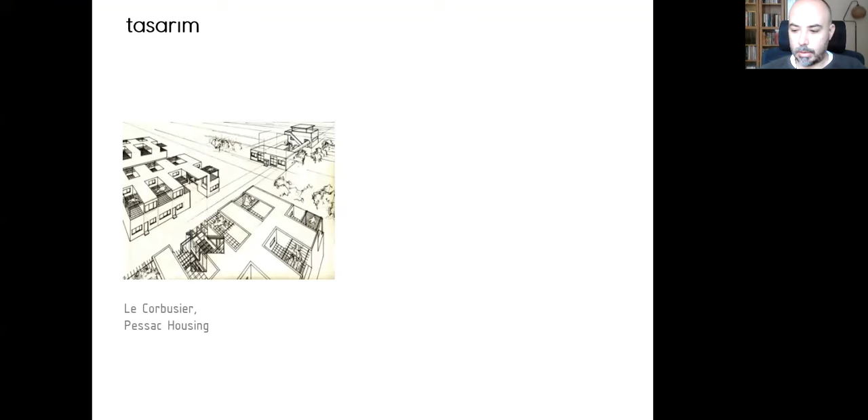How can we define the notion of a building? Obviously, there isn't just one true definition. There can be many different aspects, many different properties that define a building. But at least there are two common grounds that we can meet. First of all, we are trying to create living spaces for people, so we are talking about a definite function. These creations should execute a function in a proper way.

If we stop there, then we are just talking about engineering. However, our job has one other side. It's about the art, it's about the aesthetical values. This is something that we can say. Our creations have to have these two as equal partners. Both we need to consider the function and the aesthetical aspects.

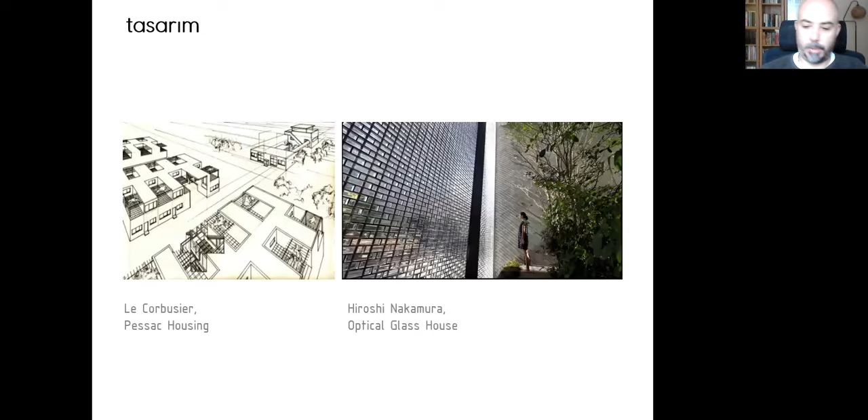This goes nearly the same for the design itself. It's very hard to make a certain definition for design because we know that it changes according to different conditions, and there are many different ways to do that all around the world. It's a very unique process, but we can at least say that it's a series of steps we make decisions in, an order.

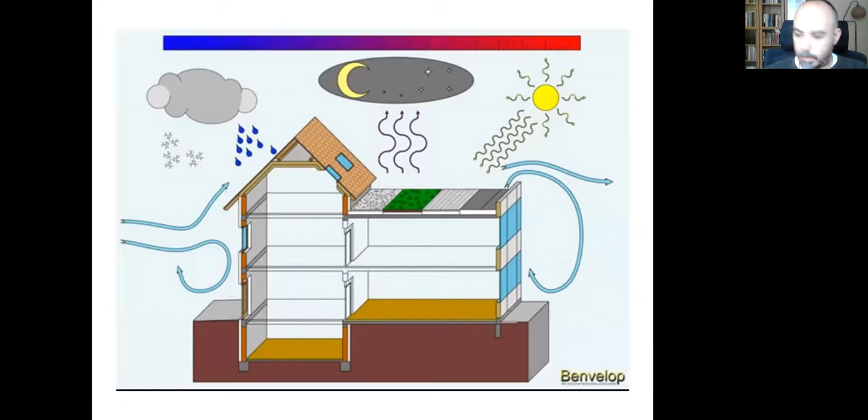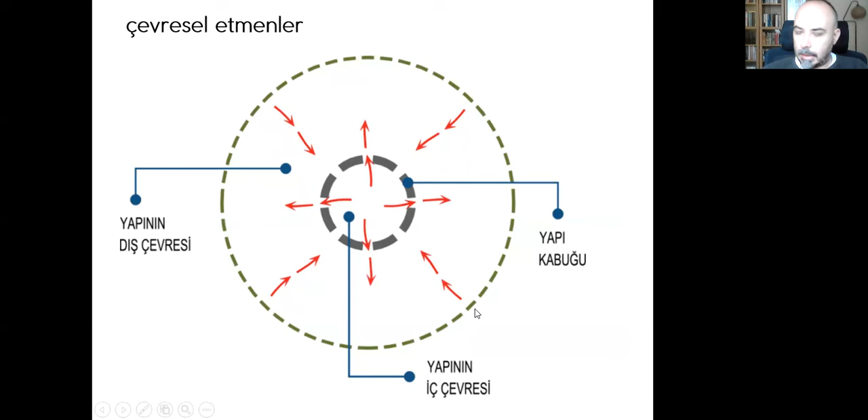That is the boundary that separates two different spaces. This envelope contains an indoor environment, and it is being surrounded by an outdoor environment. And all these environments are interrelated. They are affecting each other.

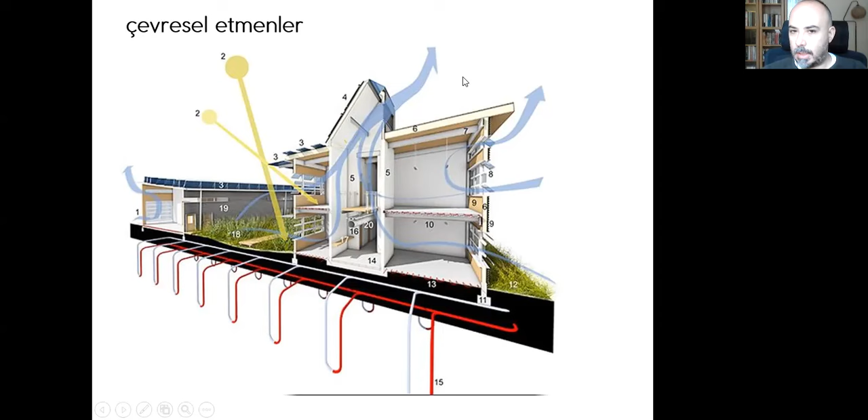Both the indoor environment can affect the outdoor environment, and the outdoor environment is definitely affecting the indoor environment, such as in the outdoor environment we have sun, and when the sun rays hit this envelope, this shell, it causes the indoor environment to heat. The air inside becomes hot. And there is wind, the movement of air in the outer environment, and through the gaps of this shell, the air can move towards inside.

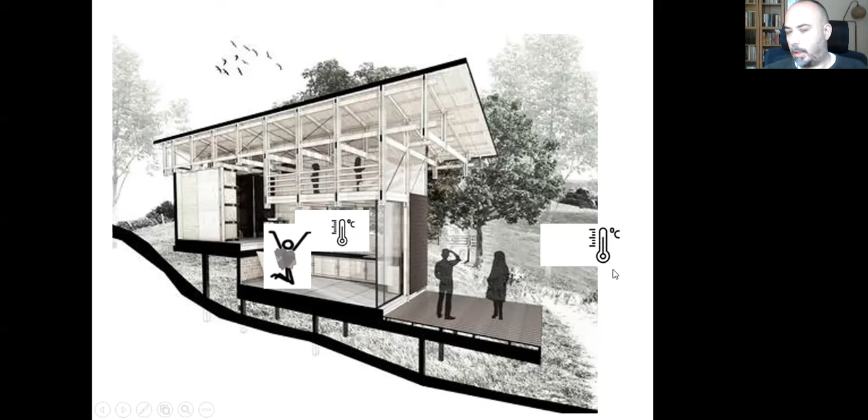Things like that. So our main duty is to create a nice shell that we are actually separating a part of the outer environment in order to create living spaces for people. Let's say that in the indoor environment, there is our user, and they need a certain air temperature for their health, for their comfort. But this property of the indoor environment is being affected by the outdoor air temperature and outdoor wind and the sun in the outdoor environment. So if, as the architect, I manage to relate these two different environments in a better way, in a nice way, then I can guarantee I can create a nice indoor environment for the user.

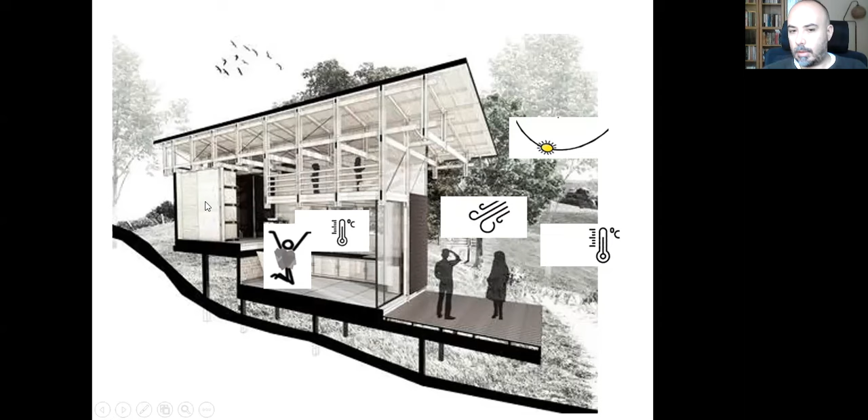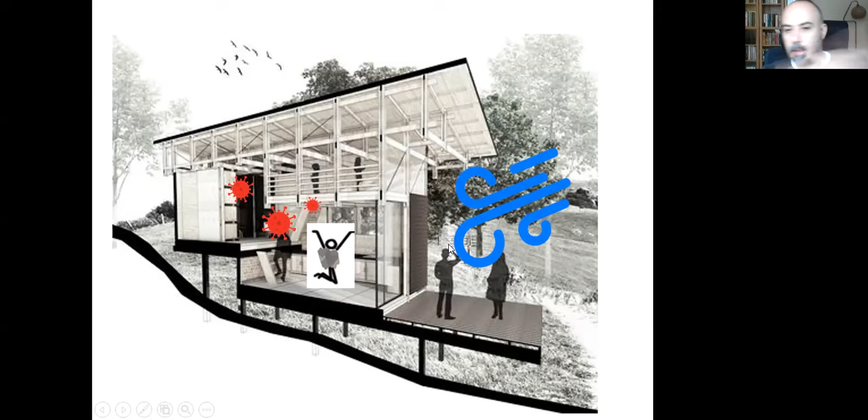Let's give another example. Let's say that this user is sick and they are coughing and sneezing and spreading the virus in the indoor environment. But as the architect, if I design this shell, this relationship between these two environments, then I can have a nice air movement through the shell so that I can spread the virus out. I can get rid of the virus.

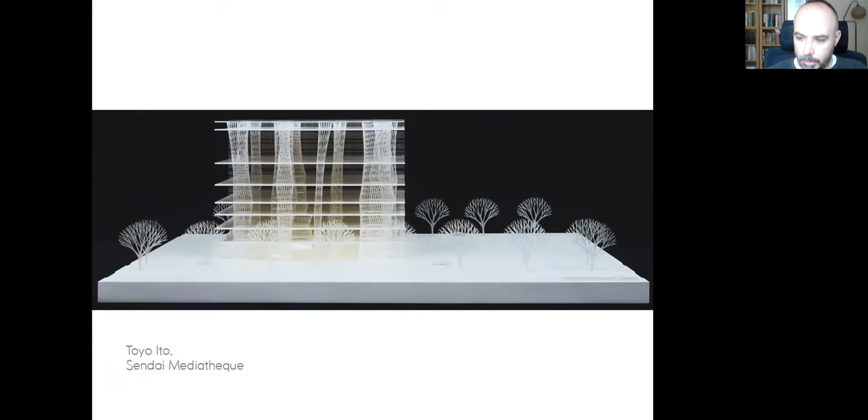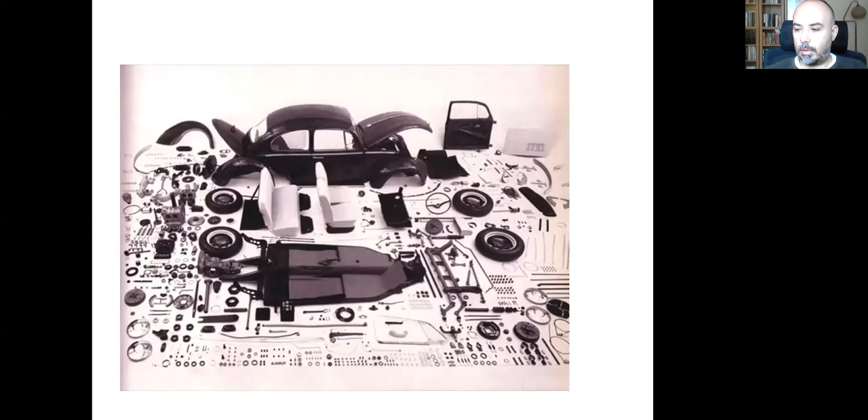So we can say that at the end of a good design process, we can come up with two basic properties for our creation: to have a true functionality, and to have certain aesthetical values. In order to do that, first we need to make a good analysis. For the analysis, we can say that it is approaching a whole, a unity, and examining its different parts one by one in detail.

We have 3 C's. The concept, it means the idea, an idea, a thought system. We have context, it means the environment, the situation, the media, and the last one is content. It means something that is being enclosed by an outer envelope, such as I have this cup here, its content is coffee, and this cup stands on a table, so its context is the top of the table surface.

At the beginning of the process, when we just started, we may not have anything about a concept. It is very normal, because we have just started and we are not expected to have ideas about what we are going to do. So at the beginning, we have just these two.

We are going to design a building. That building will have a content, an indoor environment, and certain users inside it. And the building will be situated in a certain place, we have context. So we can start by analyzing these two, and in time, as we get information, as we collect information about the content and the context, we can come up with interesting ideas. We can create a concept.

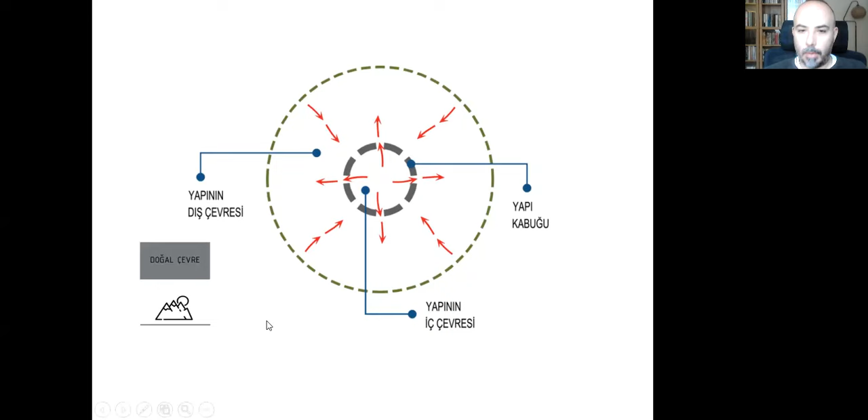On the outside, in the outdoor environment, we have the natural environment, we may have a built environment and social environments, and on the inside, we have our user. So let's start with outdoor environment analysis. The first thing we are supposed to do is to understand the sense of that place. We need to make a deep analysis, collecting lots of data about that place so we can understand its sense. This is a very nice comic that I like so much.

The first item on our list is the natural environment. We can talk about different properties, and climate is the first one. We know that every place on earth has a certain climate. It changes through the year, through different seasons, and we need to know how the climate is in that particular space throughout the year.

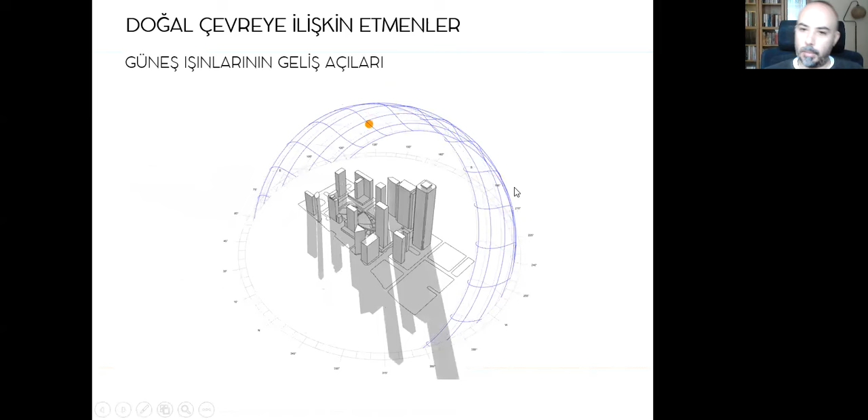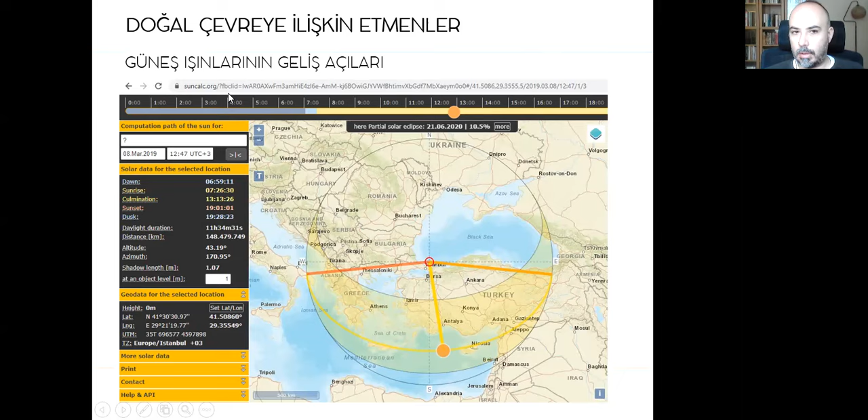Here we see the sun's position changing through the day, and this is the sun's position changing between winter and summertime. We can use certain websites for this, just as an example, suncalc.org. Here what we see is the position of the sun in different seasons.

In the summertime, we know that the sun rises not from the east, but northeast, and it goes very high, with nearly more than 70 degrees, and it stays longer in the sky. And in the evening time, it doesn't sink at the direct west direction, but it goes up to northwest.

At around March 21 and September 21, it rises directly from the east side. It goes high up, but not as high as in the summertime. The angle is at around 50 degrees, and it sets directly at the west direction.

But in the wintertime, it stays in the sky for a much shorter time, and we see that it rises from the southeast direction. The angle is nearly 25 degrees, and it sets in the southwest direction.

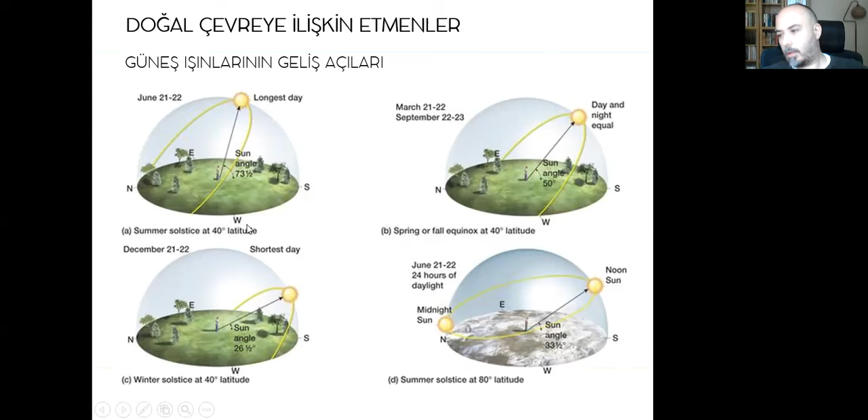So all these values, all these angles and times, change according to the geographical location. So we have to collect data and make research about the sun path throughout the year and throughout the day for that particular location where we are going to make our design.

Also, we can collect data about weather, air temperatures, air humidity, air pollution. Again, we need to look for the whole year and try to understand the properties of air temperature, if it's too hot, too cold, or a mild climate.

This goes the same with the relative humidity. We need to look throughout the year to see if the humidity level is high or low, and after collecting this data, we need to interpret it and try to understand what kind of problems may appear and what kind of solutions we can offer.

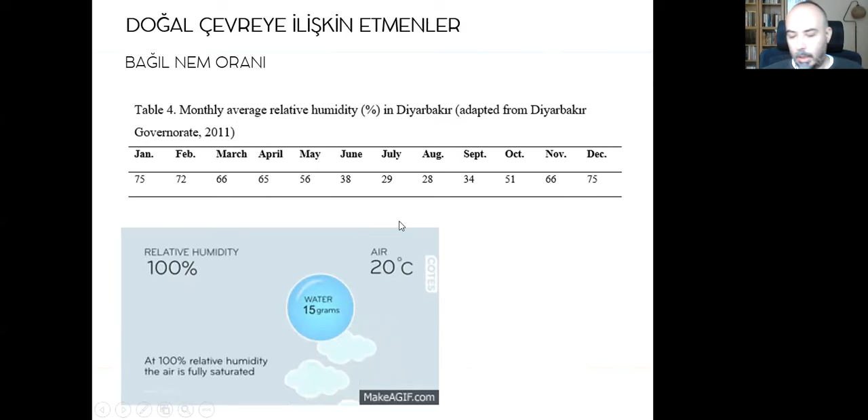Because if it is a very hot and humid climate, it means we need to create nice air movements in the inside environment by using the factors existing in the outer environment, so that our user will have a nice and comfortable living space.

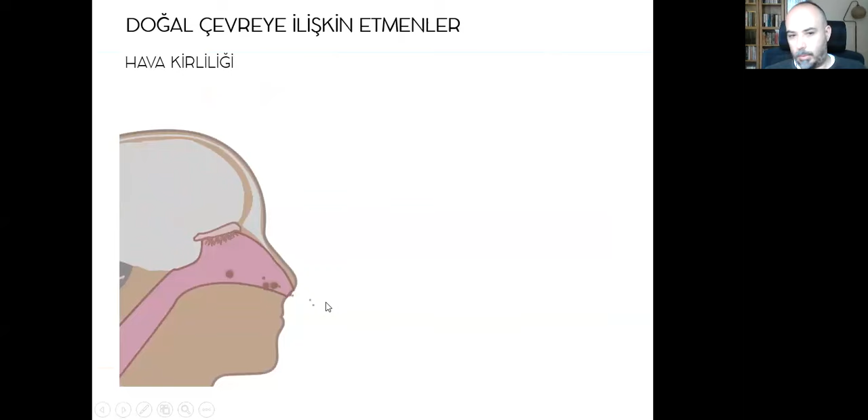And this goes the same with air pollution. If the pollution of that space is high, it means our user may be affected in a negative way. They may get sick. We need to look at the precipitation, its type, its duration, and its level.

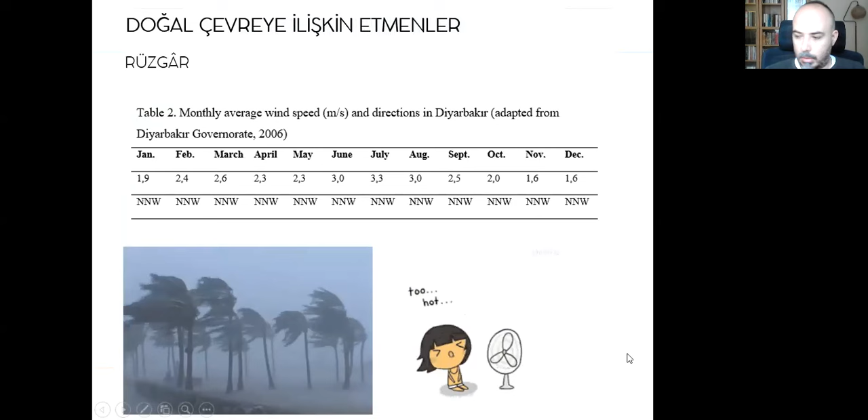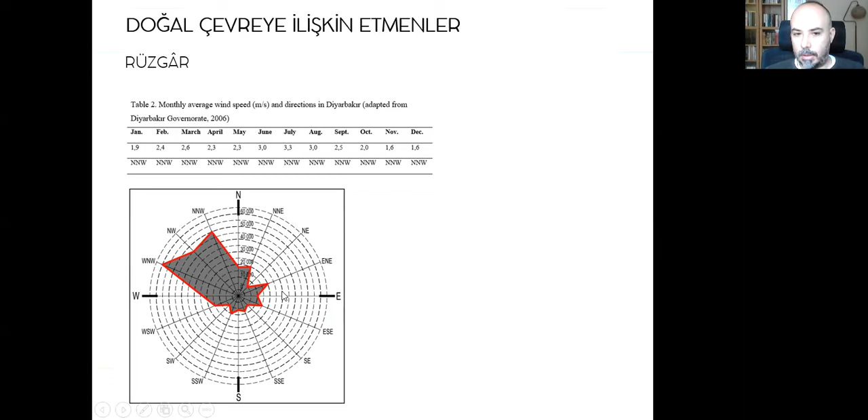Throughout the year, wind direction may change from month to month. We need wind if it is too hot, and we need to avoid it if it is cold and destroying. We can look for a wind rose like this, which shows that for that location the prevailing wind direction is northwest, but in other months it gets different winds from various directions. If we don't account for this, we can cause a situation like this.

Maybe it can get very dangerous. But if you know, we can have precautions for this. We can come up with decisions to avoid this situation.

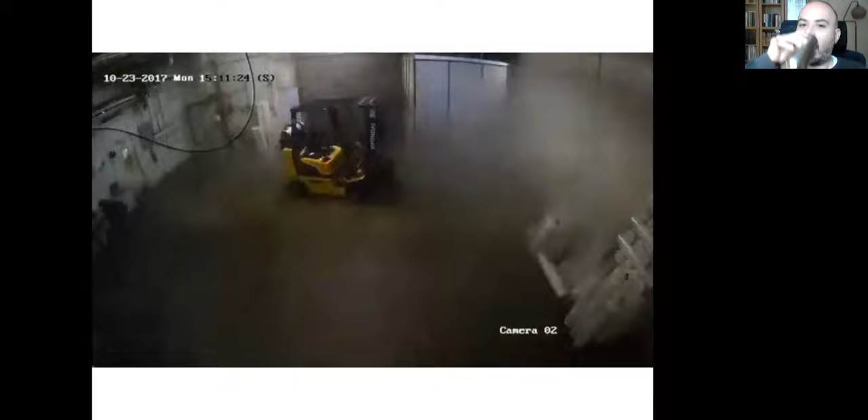And at the end, we see that there is no wall. The whole facade was smashed down, and this forklift was turned on its side.

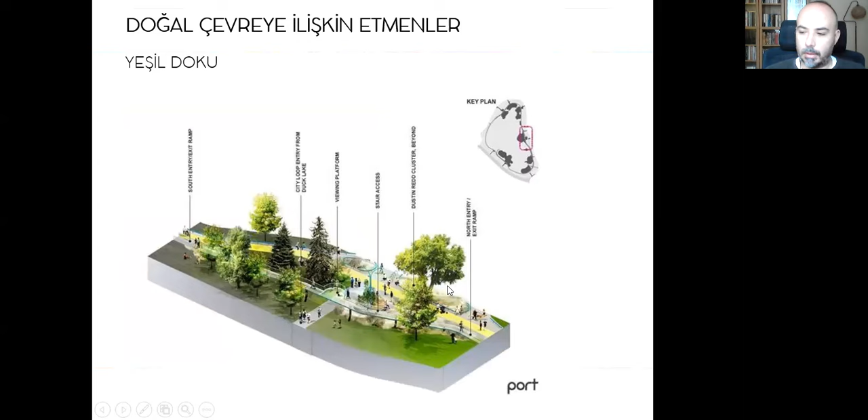But it can be bad water too, polluted water which produces nasty smells or diseases. So we have to look at the situation.

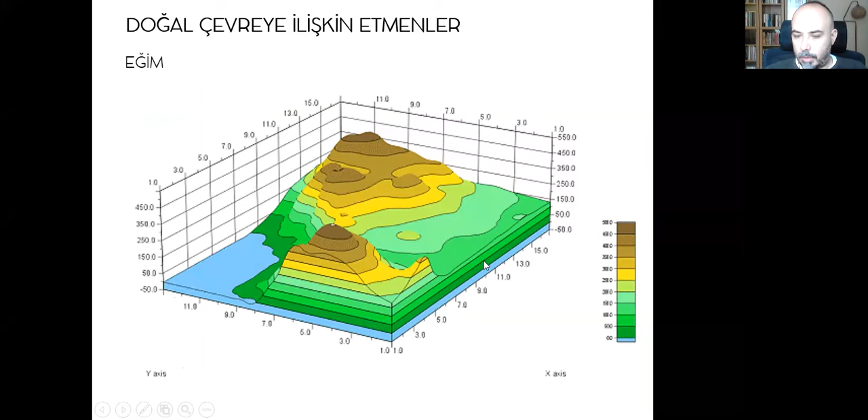One of the other items is the topography. We need to look for the topography of the outer environment. We can create these contour lines by using our maps. As you see, there are some numbers here. These numbers were written by engineers, and they calculate the height of that particular point from the surface of the sea.

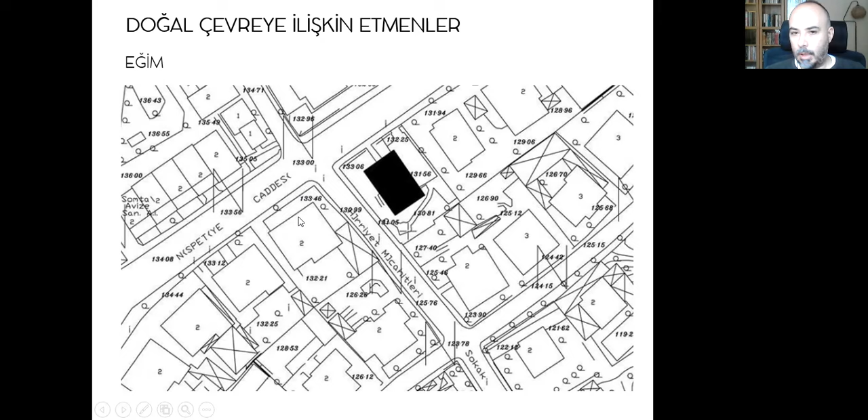It says here that this point is 133 meters higher than the level of the sea, and it changes—here 133 and here 128—so it means that there is a slope. By using these numbers, we can create the contour lines and understand the topography by looking at these lines.

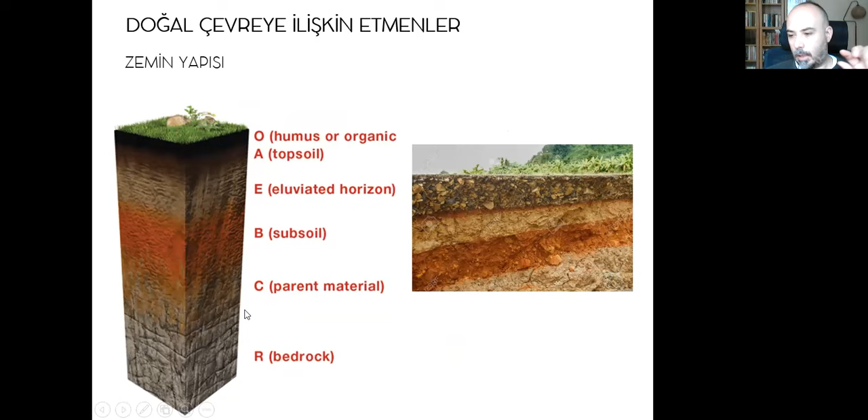Also, we need to check the soil type. Different soil types have different carrying capacities.

A very important factor for our country is earthquake zones. We need to check the location and if it is prone to earthquakes or not.

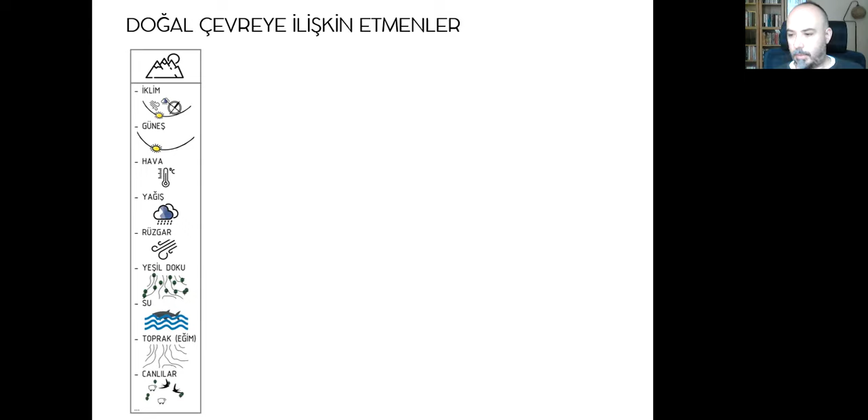This was just a general list of items that we can talk about regarding the natural environment. But of course, you can come up with different things. I created this list just to guide you, but you are not limited to these items only. When you start your design process, you can examine the place where you are going to make your design according to this list, and you can find different items, different factors particular to that space.